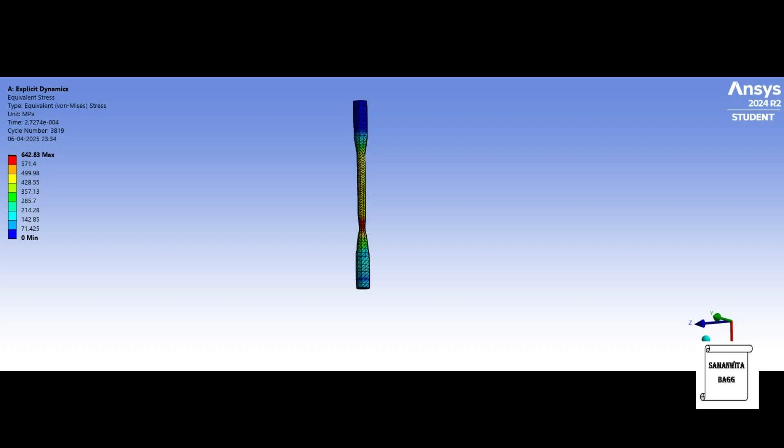In this session, we will analyze a bar for its tensile test. We will use the explicit dynamics module for analyzing. We will start by double-clicking on explicit dynamics. We will first go to engineering data. Engineering data sources.

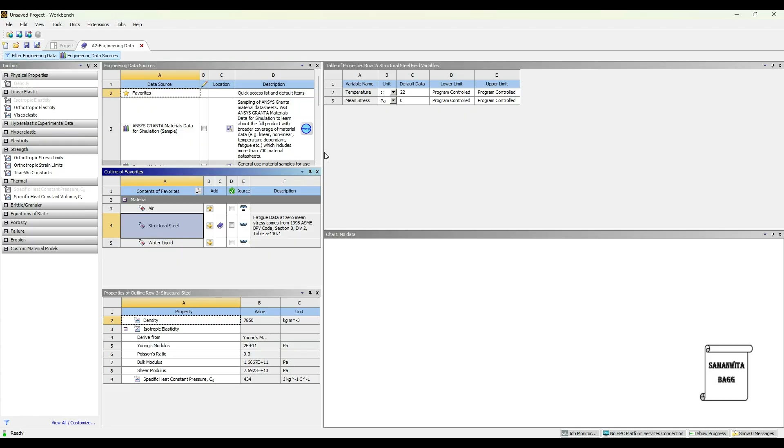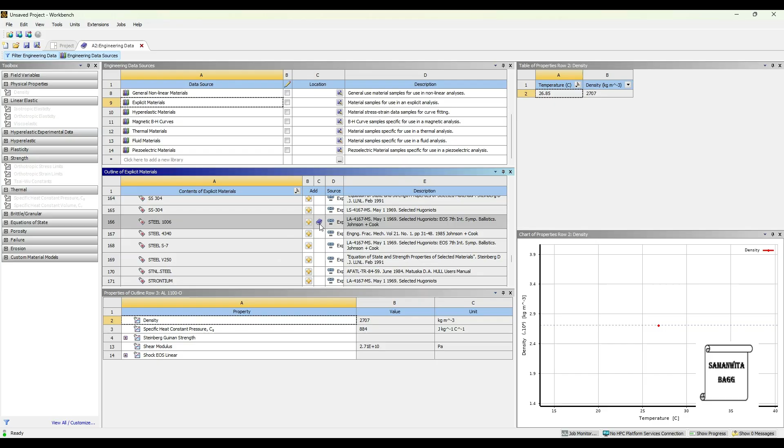I'll double click on explicit materials. The material which I'll use is steel. So I'll choose steel 1006 as the material. So once you've selected the material, you can see there's a bookmark over here. We'll go to project and update project.

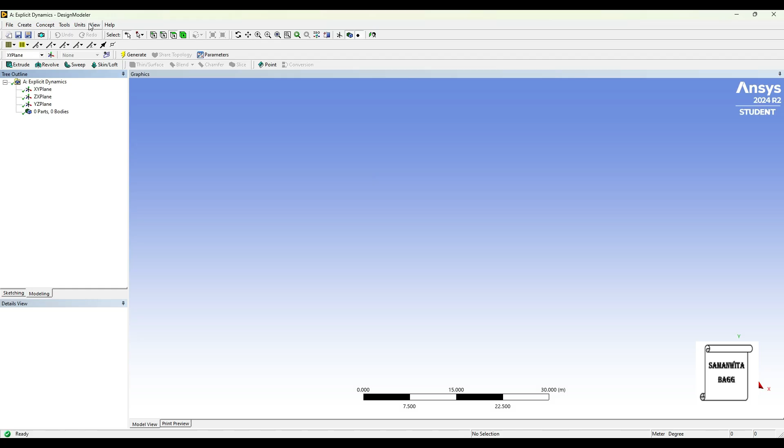Next, I'll go to geometry and right click. New DesignModeler geometry. We'll go to units, millimeter, XY plane, look at. I'll go to sketching. I'll use the line option. First, I'll draw a straight line. Then I'll draw a vertical line.

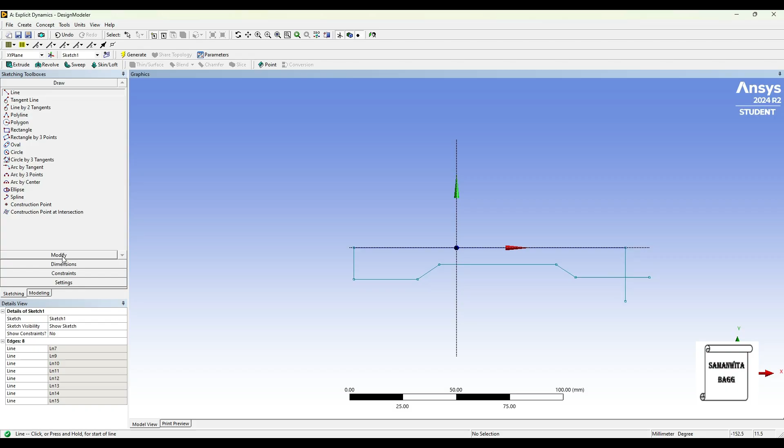From here, I'll draw another horizontal line. Then an inclined one. Again, a horizontal line. And then I'll replicate with an inclined line, a horizontal line. And from here, I'll draw a vertical line. I'll go to modify and choose the trim option. I'll remove these extra lines.

Then I'll go to dimensions and give dimension to these lines. Also, I'll go to vertical and choose the distance between these two lines. And horizontal option I'll use for giving the distance between these 2 points. So we will start with say V2. The diameter of the rod, we are making a cylindrical rod.

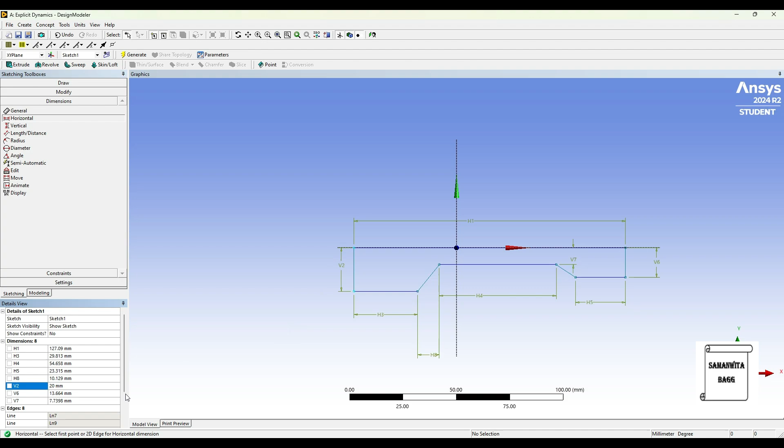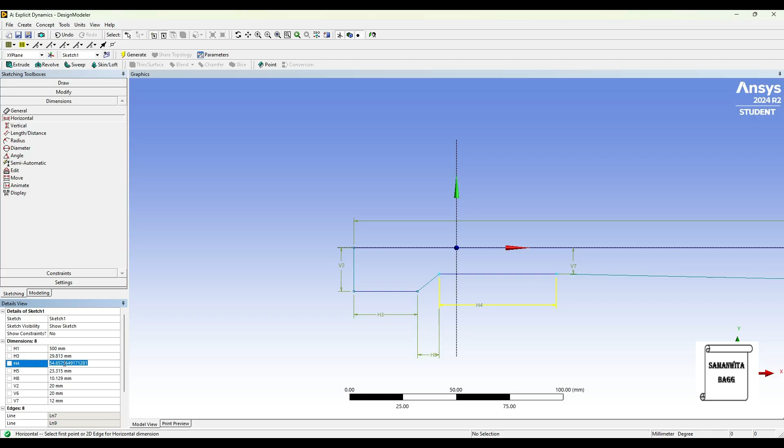So this is say 20. V6 is symmetric, so this is also 20. V7 is 12. Next I'll go to H1. The total length of the rod will be 500 mm, that is 50 centimeter. I'll give the value of H4 as 200. I'll give the value of H3 as 100.

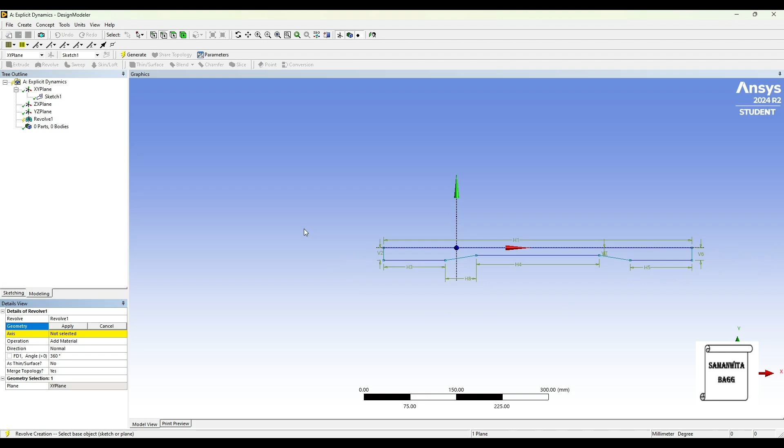H5 as 50. H5 is 100 and H8 is 50. So you can see here the shape has been created. Now I'll go to modeling. Here I'll choose revolve. I'll select the sketch 1. Axis is the central one. Apply. It's a 360-degree turn that will take and generate. So this is the bar for which we are going to analyze. So now I'll close this.

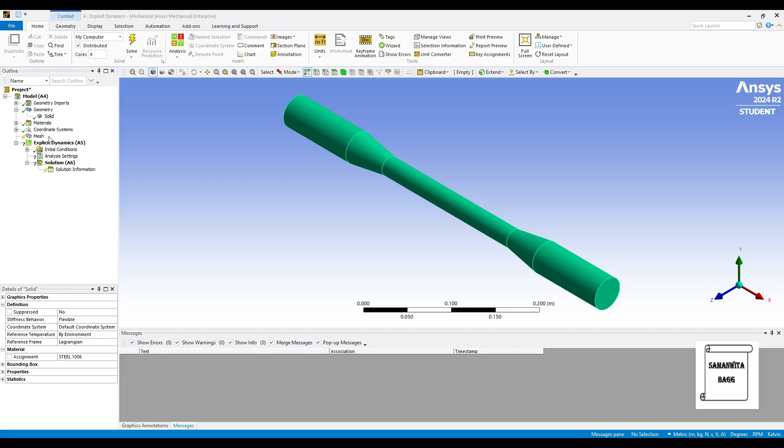Next I'll go to model and double click. I'll first go to geometry and change the material for this solid to steel 1006. Next I'll go to mesh. I'll give the value of element size as 0.01 meter and generate. Now I'll right click over here and I'll insert method. I'll select the entire geometry. I'll give this as tetrahedrons and generate once again. Now I'll go to analysis settings.

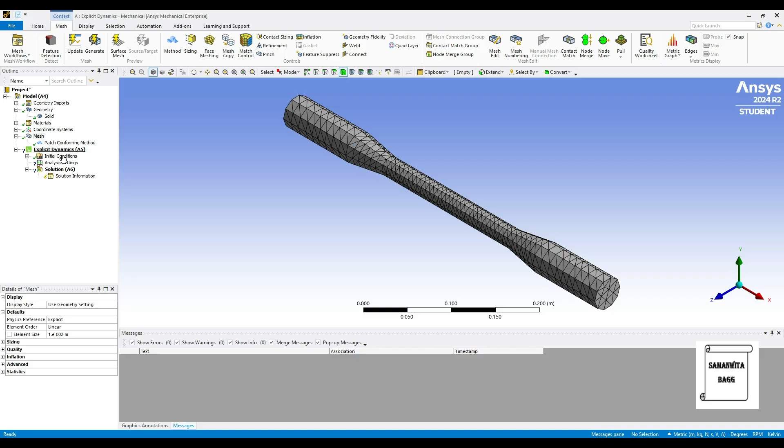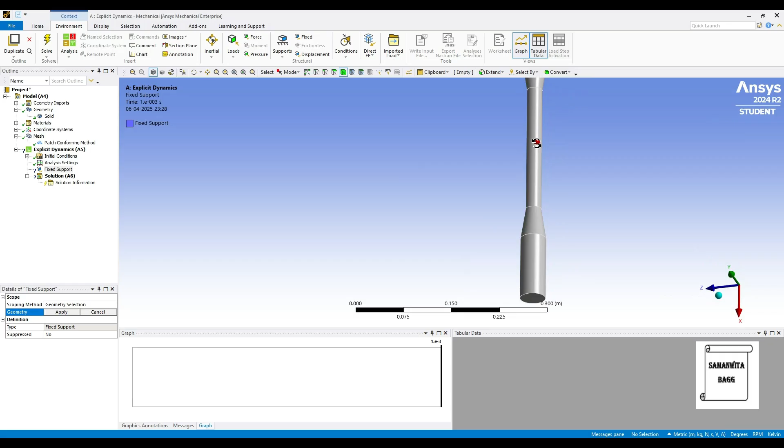You can see here there is a question mark. It is asking for the time. So I'll give the time as 0.001 second. Then I'll go to explicit dynamics, right click, insert, fixed support. Now if you have observed the analysis of the tensile test, one end is fixed and on the other end there is a displacement which is given. So what I'll do is I will select this face. I'll press Ctrl and select the other one. I'll click on apply. This is fixed.

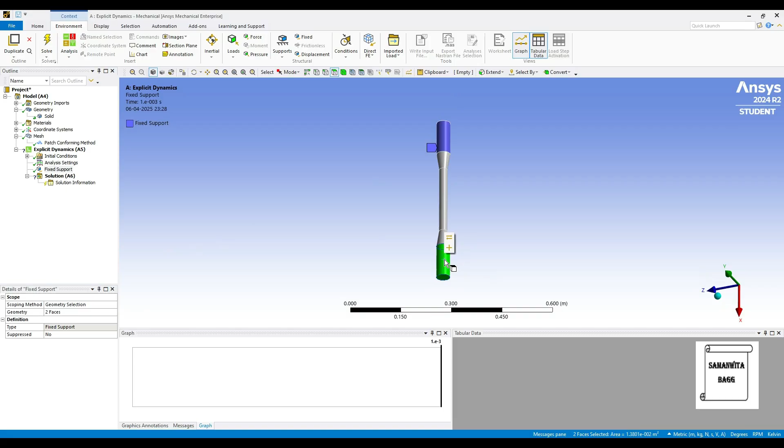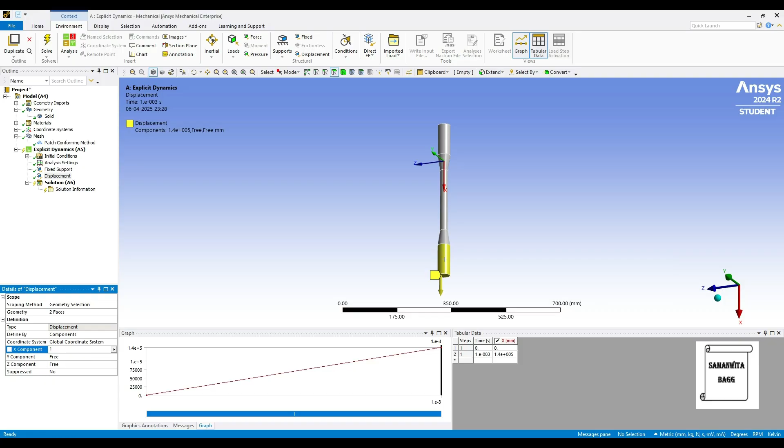Next I'll select these two sides by pressing the Ctrl button, and I will right click here and insert displacement. Along the x axis I'll give the displacement as, I'll select unit as mm, this is 140. Then I'll go to solution and right click and I'll insert stress equivalent. Then I'll insert strain equivalent plastic. Also I can see the deformation total. You can see any other deformation if you want. Then I'll go to solution and solve.

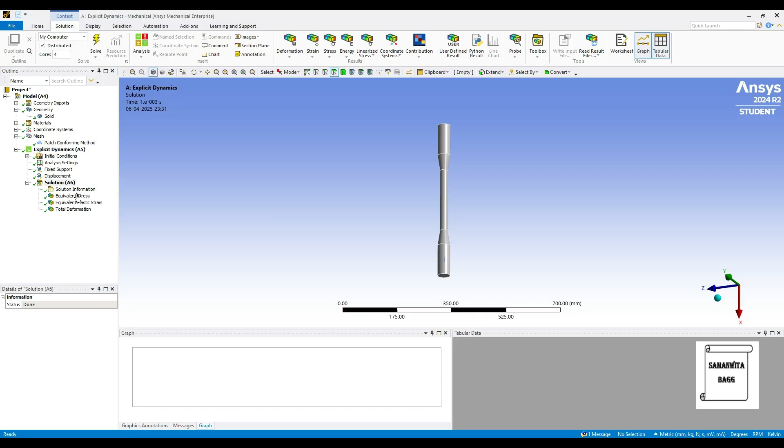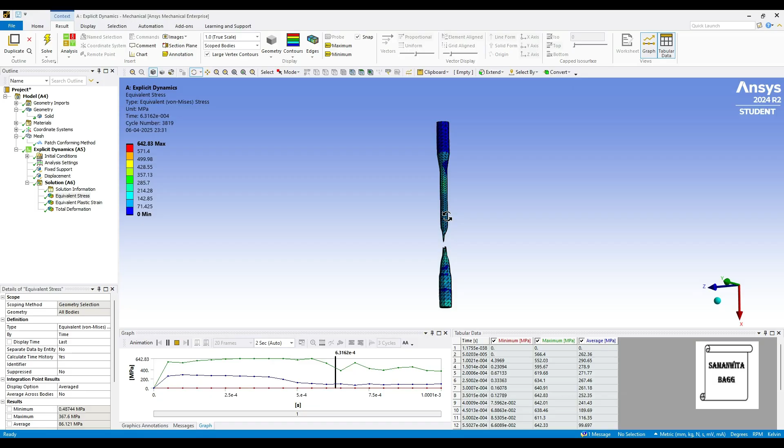So once you get the solution, first thing you will do is go to equivalent stress. You can see here the deformation is caused. So we can just animate and check the result. You can see the formation of, this is the cone formation, this is the cup formation, and you can see how the necking is formed in this red zone. The diameter reduces and then slowly there is a breaking of the material. Here you can see this is the elastic limit, after which the plastic zone is going to start. Hence you see an increase and then there is a variation of value.

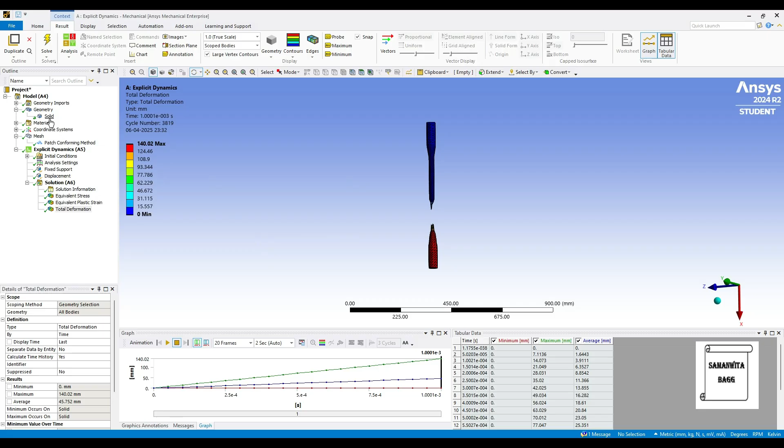We can also see the plastic strain here. Again you can see here there is a straight zone and then there is variation in the value. You can see what is the total deformation. We have given 140 mm such that we are able to break the bar and get the values. So that's how you analyze with the help of this material steel. If you want, you can change the material to any other variety of steel and get the results. If you don't want to see these meshes, you can go to edge, no wireframe, and if you analyze now, you will see there is no wireframe on it.

Here also if you want, you can change it to smooth contours such that the colors blend into each other. And here you can see slowly the diameter is reducing. This is the necking phenomena which is expected in tensile test. And then you can see the breaking of the material. So this is one of the shapes of the tensile test material which is used for this test. There is one more variety of material. I will show the analysis in the next session.